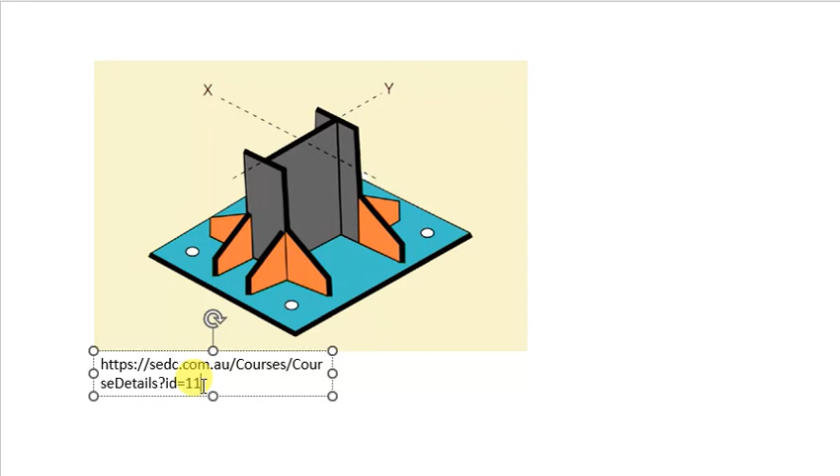I was browsing the internet and got some good pictures which can help illustrate what they really are. I got this picture from this website, you can follow through and read more about it. If you can see, this is a column sitting on a base plate. There are some steel members, steel plates, which are welded onto the column and also the base plate.

So these are exactly what we call stiffeners. If somebody is wondering what they really are and what they really do, I think this is the video for you. That is a stiffener.

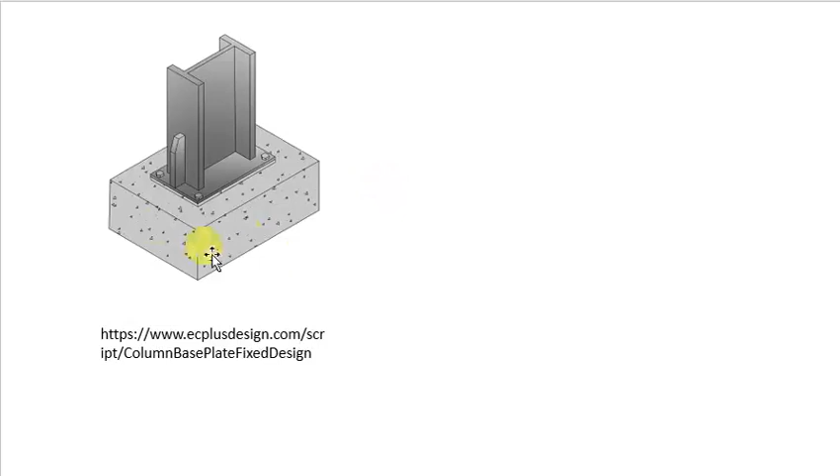I also had another picture here, another stiffener. These are called base plate stiffeners because they stiffen the base plate. We'll come to that in a short while. There's a stiffener here, welded onto the column and also the base plate. There is also another stiffener, welded onto the column. So these are column stiffeners.

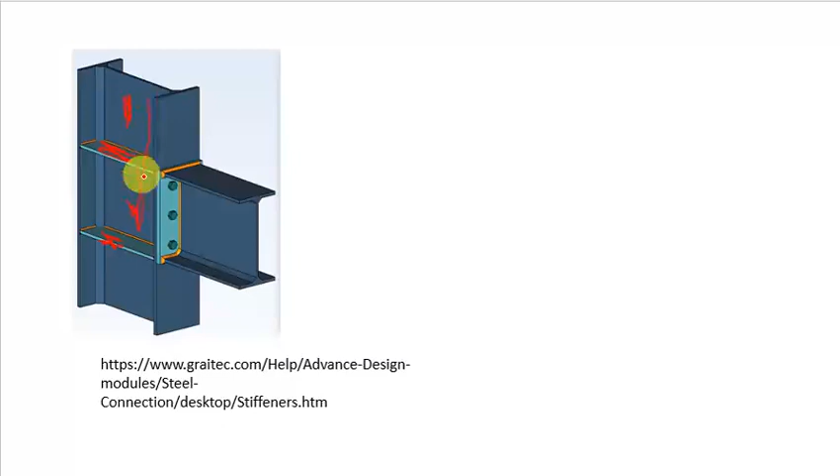This one here is stiffening the web, but why should we add them? We're going to see that in a short while. There is also a stiffener welded onto this column or onto this web. Maybe the final one, we also have stiffeners here, welded onto this web, the web of this girder. Therefore we really need to understand what they are and at what point do we really need them.

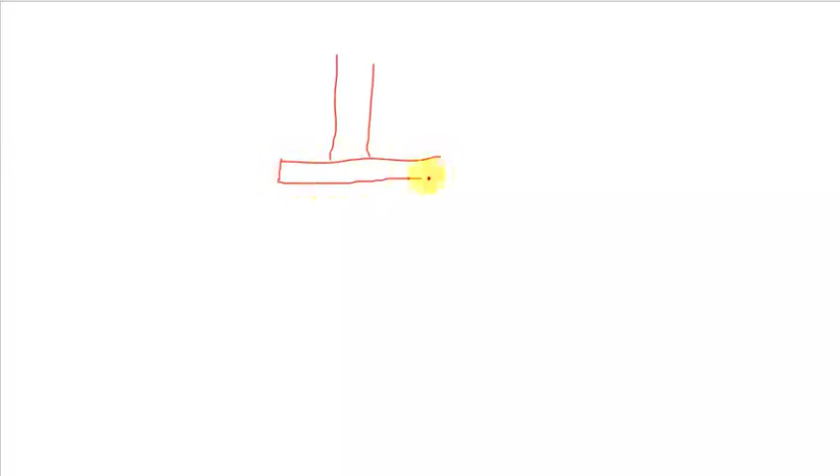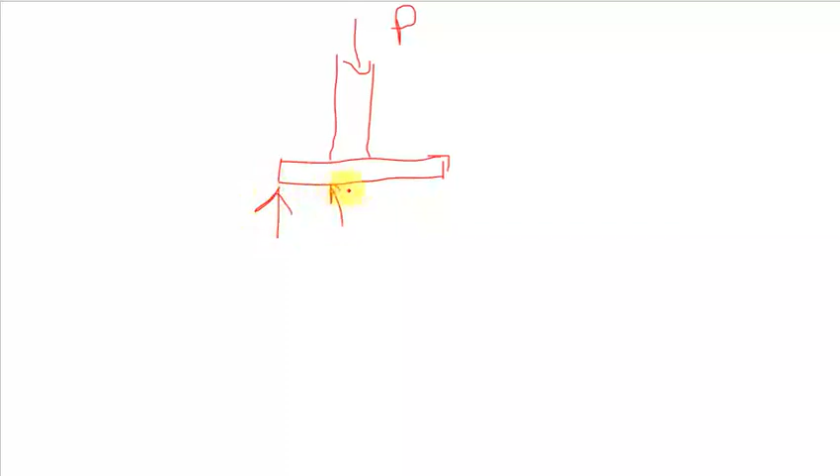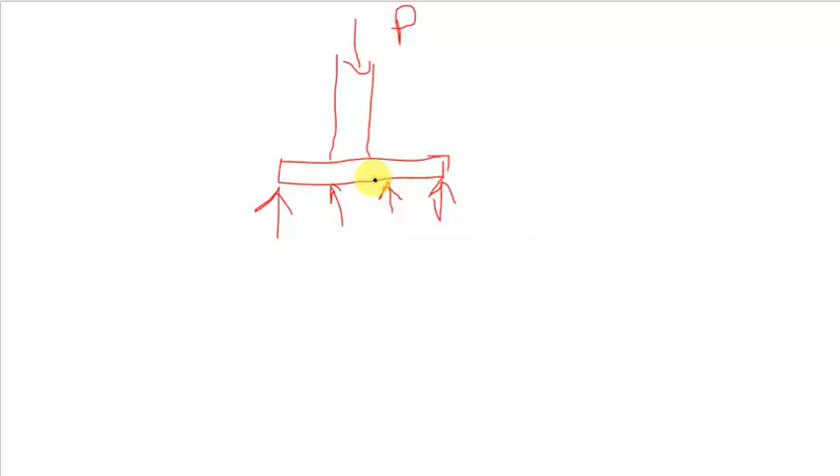If we go back to the first picture, how the base plate works is that when you have a column, I'll do a sketch for that - this is a base plate, and you have a column. Then there is a load coming down this column, say P. What happens is there will be a reaction at the bottom of this base plate, a reaction from the support below, and that reaction will cause bending in this base plate.

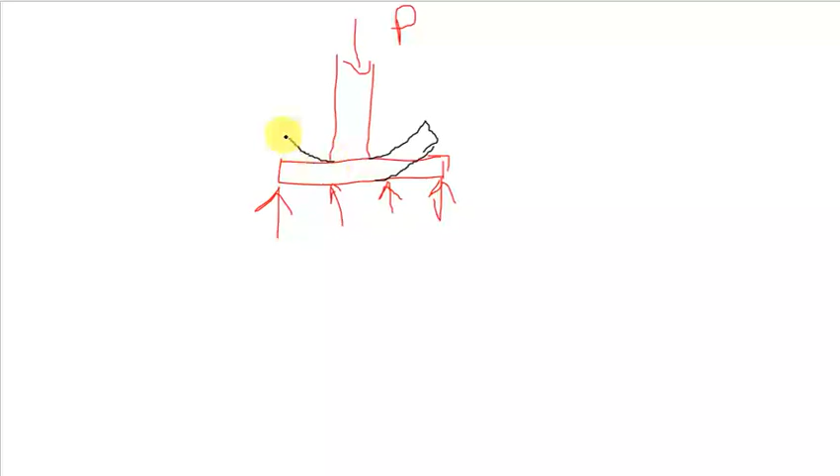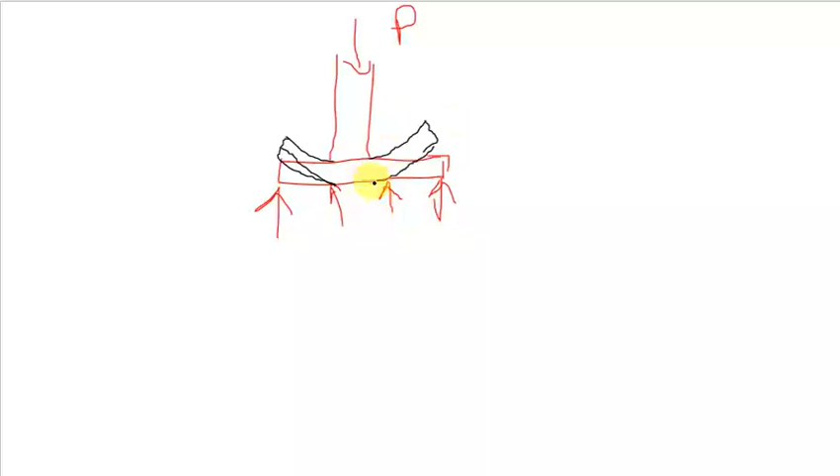So this base plate will bend and become something like this, because of that load coming down, because of that reaction coming from the bottom. So this is what we expect - it will behave like a double cantilever. We have a cantilever on this side, and also a cantilever on this side, with a distributed load at the surface here.

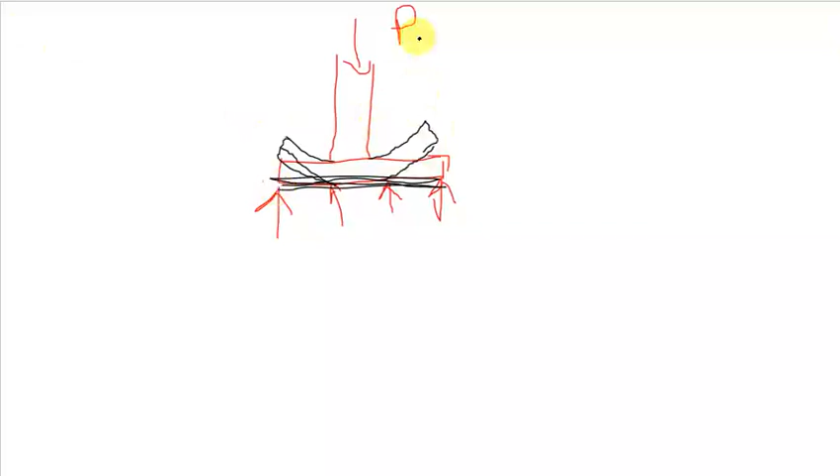So what exactly will happen? If we draw a bending moment diagram for this - this is the column, and this is the base plate - you're going to have something like this. That is the bending moment diagram. Obviously it's going to be parabolic, but for simplicity of design we just do a linear curve. So this is how the bending moment diagram will look like for this one.

That means we have very high bending moments at this point, at the edge of the column here. This is just a cantilever supported by this column, so it bends like this, it also bends like this, so we have very high bending moments.

But if you have to design for this bending moment - let me just delete this, let me erase this - if you need to design for this bending moment here, because this is the maximum bending moment, that means you have to design your base plate to take that bending moment, which is very high. That means you'll require a very thick base plate, which at the end of the day is very expensive.

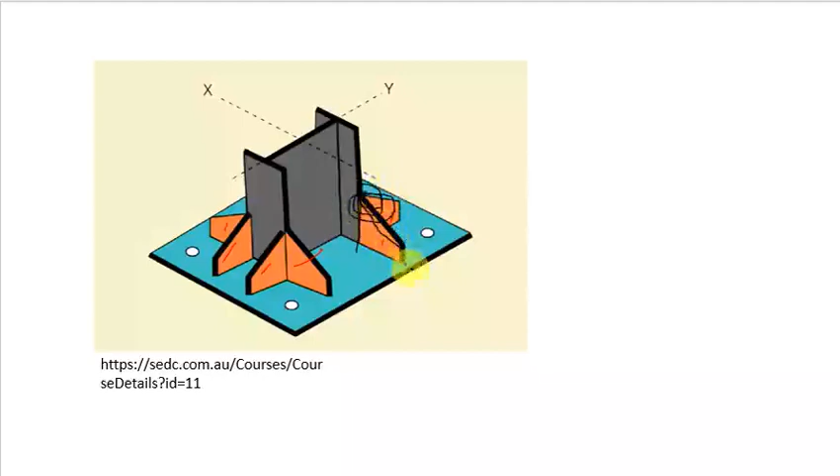That means you don't really need very much area at this point, because there is very little bending moment there. That is exactly why we need stiffeners at the base plate, so that we don't have excessively thick base plates. We can just do a small base plate, but obviously you have to check that through design.

After that we just add stiffeners. So what will happen here, after adding stiffeners, we'll have some kind of supports. We have a support here for this base plate. Look at this base plate here, it is now supported here, and it is also supported here. That means the effective length is now reduced.

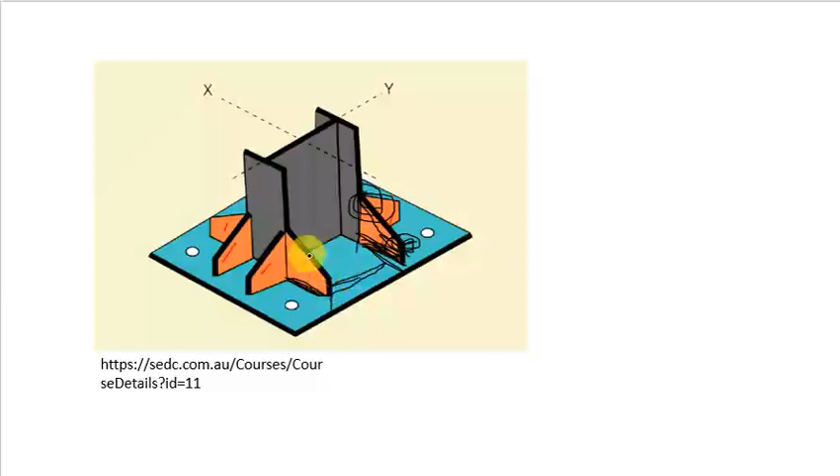Now take for example, you want to draw the bending moment diagram for this one. Compare if you don't have a stiffener and if you have a stiffener. If you have a stiffener, the bending moments will be so small that they can be carried by the plates alone. But if you really do not have the stiffeners, that means you have to design for a very thick base plate.

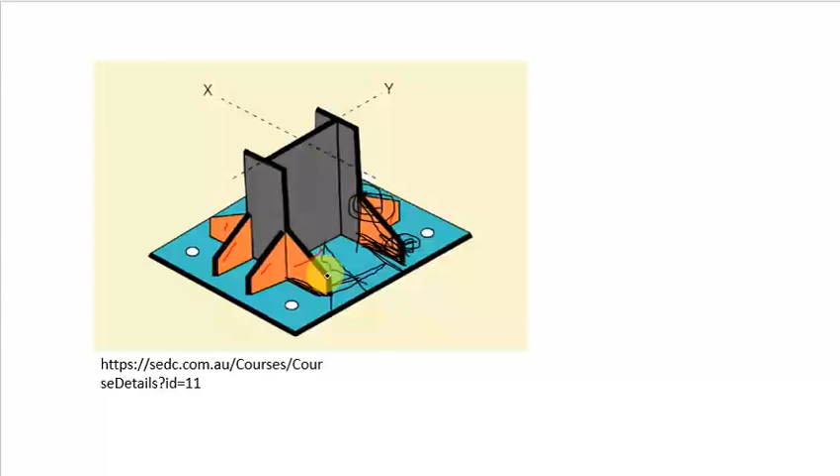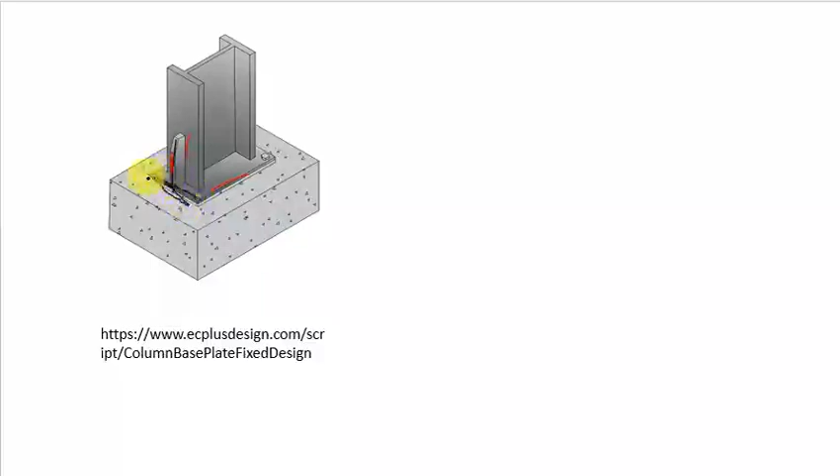The same case applies for this photo here. If you look at this stiffener, it is added to stiffen this base plate, so that it doesn't yield because of the excess bending moments. So that is literally the idea about the base plate stiffeners.

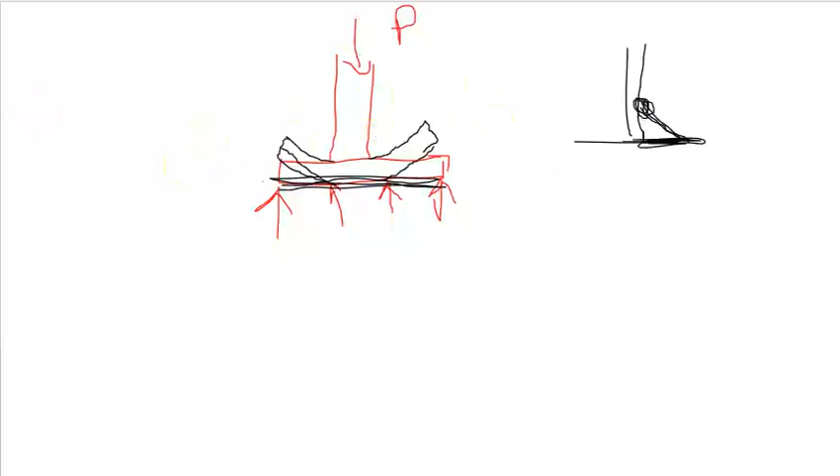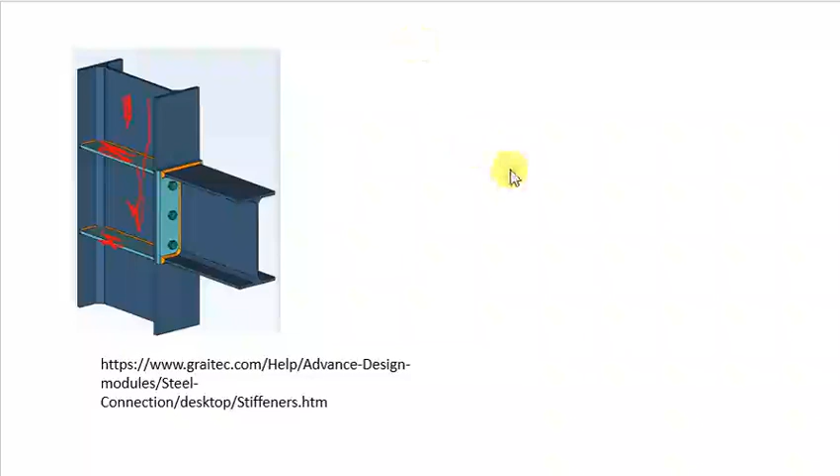So we have the base plate stiffeners, and we also have the web stiffeners. That is a very good explanation for the base plate stiffeners. We can check again the web stiffeners. If you look at this one here, let me just do this. Yeah, so this is a web stiffener.

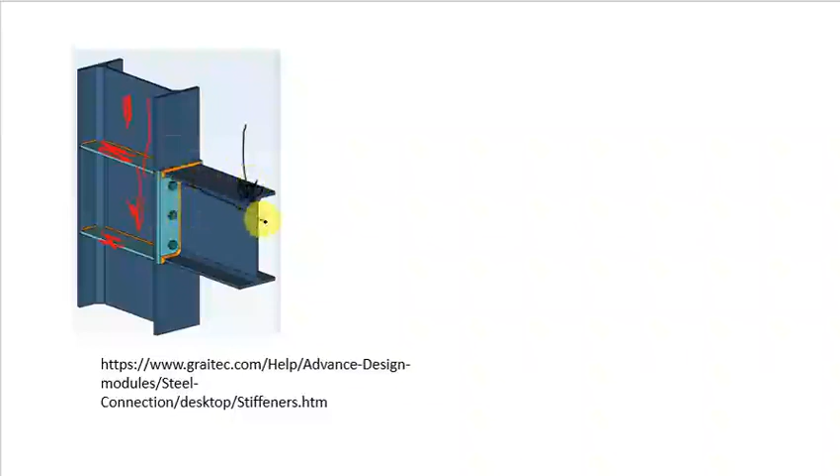And how does it work? If you load this beam here, which is attached to a column, and apply a point load at this point, what will happen to this beam? This flange will be in tension, and this flange here will be in compression. I hope we understand that.

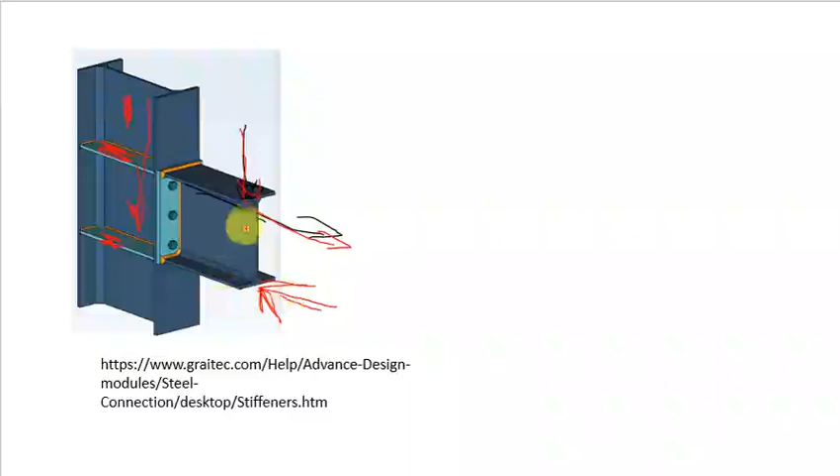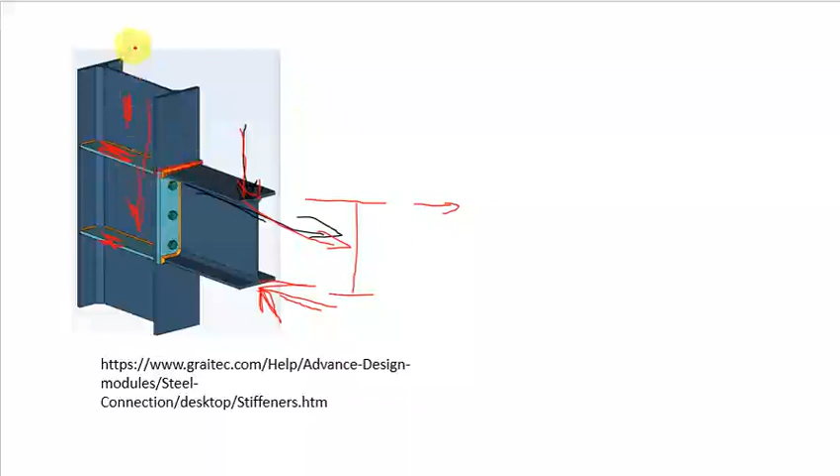If you apply a point load at this point, that will set this member into bending, and if it is bending, then this top flange will be in tension and this bottom flange will be in compression. So what happens is that is the depth of your section, and you have force at this point. Actually, you have a moment, because the distance from the centroid of your member to where the load is applied will give you a moment. That is an external moment, and that external moment will cause the internal moment in this member.

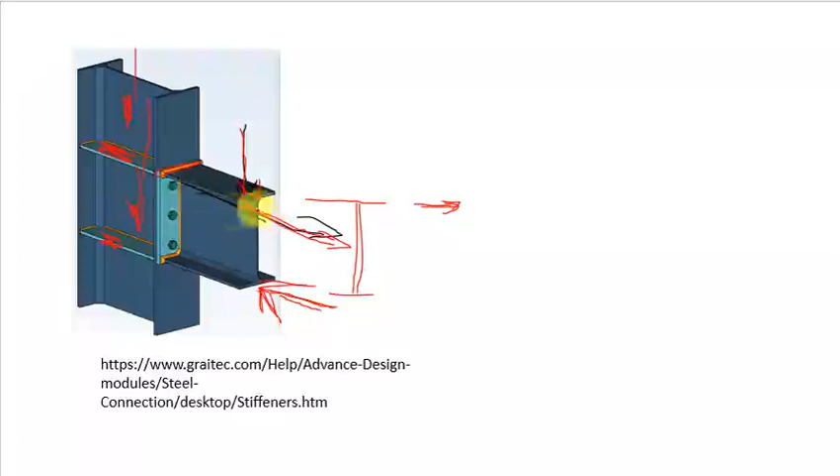So if you take this force, you multiply by the lever arm, which is just the distance between these forces - this is the tensile force, this is the compressive force. If you take this force and multiply by this distance, you will just get the moment, which is force times distance. That means if we have this moment, then we can get both the tensile force and the compressive force, because we know the distance here.

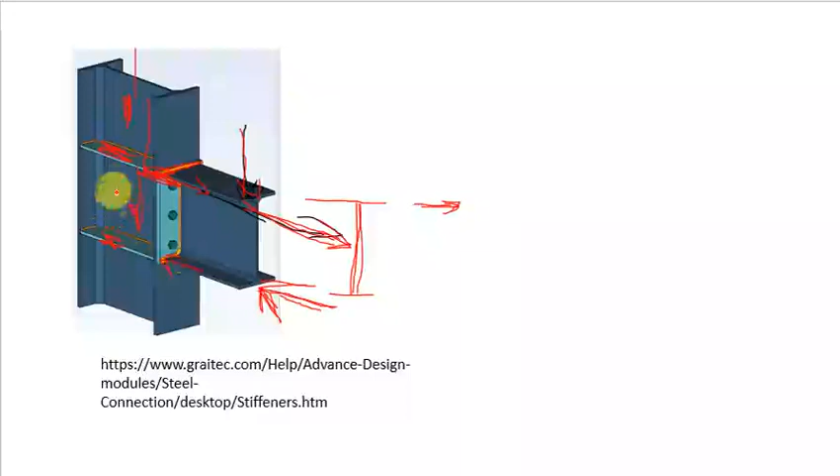So after that, we are now applying in this column a tensile force at this point. Then at this point, we are applying a compressive force. What will that do? That will stress our web here very extremely.

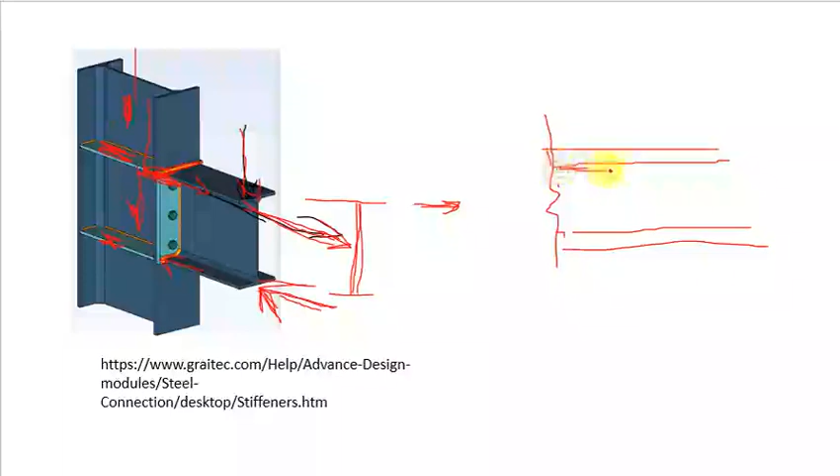If this is a web, let me just draw an elevation of a steel section here - these are webs, these are flanges. I've just drawn it, I can also do a section that will make it look clearer. So we have a section here, this is a steel section. This is just an elevation through it, as we look at it from this side.

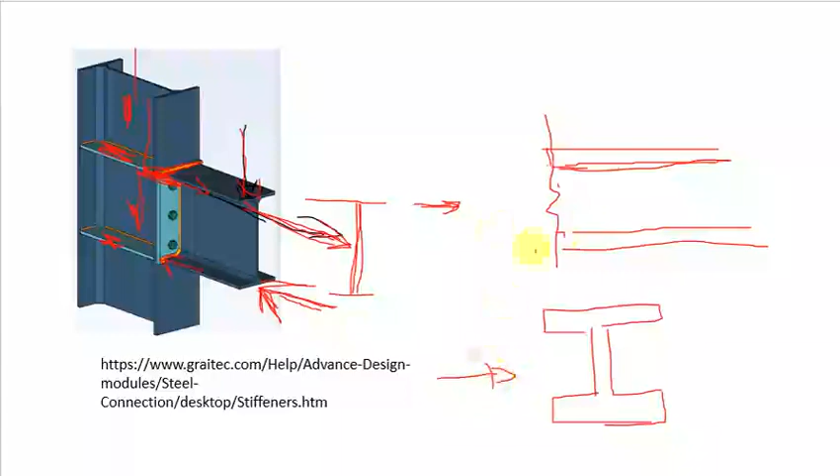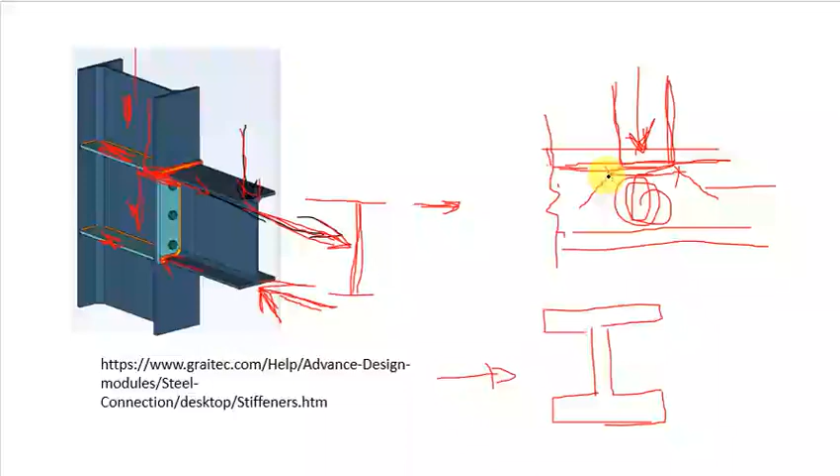And then you apply a point load at this point. If you apply a point load here, the load will just be carried by some part of this web, not the entire web. So if we have maybe a silo, or a secondary beam sitting on this primary beam, then what will happen is that load will be distributed like this. That means at this point in our web, the area which will be carrying that load is just some area specified by the code - you can get that from the code. That means this is the only area which is carrying that point load from the top.

That is the only area which is carrying that point load. And what will happen if that is the only area carrying that point load? This web can buckle, or it can cripple. It can also crush, right? So buckling...

Buckling is where you have this web bend out of plane before yielding. The entire web buckles out before yielding because of this concentrated load here.

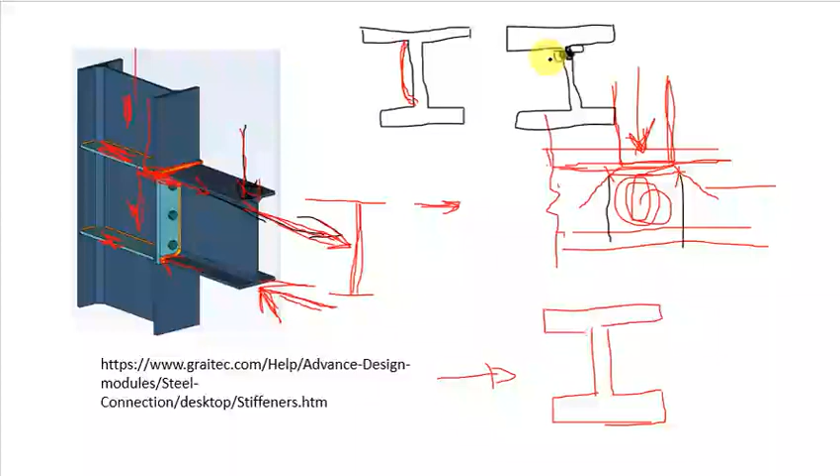And if you speak of this web buckling, or web crushing, or web yielding, it's very simple. You just have a web, a section, but this section will just fail at some point. It will just crush - that means to yield. That means the material of the web has reached the yielding point.

So what you have to do is make sure that you design that web to be able to carry that load. We also have localized failure, where you just have a section of this web buckling - it's called local buckling of the web. So you have to really check your web. If your web is not sufficient, then you have to make sure that you provide stiffeners. So that is where stiffeners come in.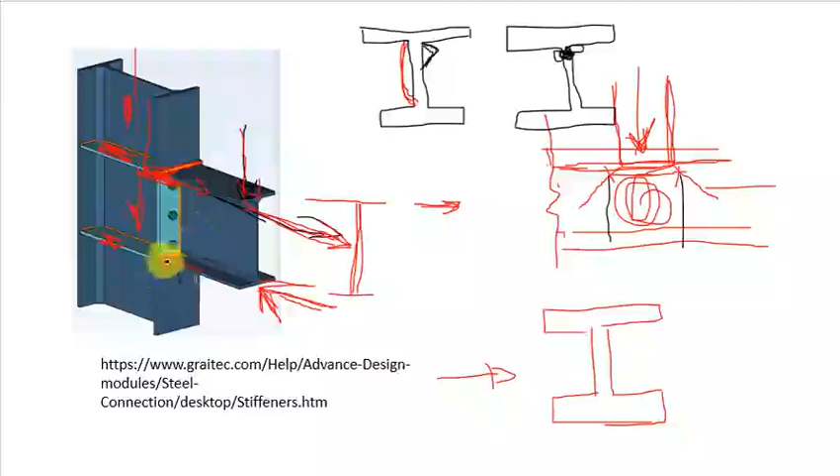The reason I was explaining this is to bring that point right here, that this force will just be carried by some part of this web, and this part of the web can buckle out, it can crush, or it can cripple. So what we need to do is ensure we do the check, and ensure that web can really carry that load. If it can't, then we provide stiffeners.

So these are the stiffeners. Stiffeners are meant to stop this web from buckling. So if you provide a stiffener here, this is a stiffener. I also provide a stiffener here. Then this section of the web will not experience local buckling or the global buckling of the web.

So that is entirely how it works. If you understand that, you'll be good to go. So make sure that if you're designing for this point load, you check for all of them. You first check for the entire buckling of the web, then the local buckling of the web, and obviously check for crushing. And if it is not sufficient, then you provide your stiffeners to take care of that.

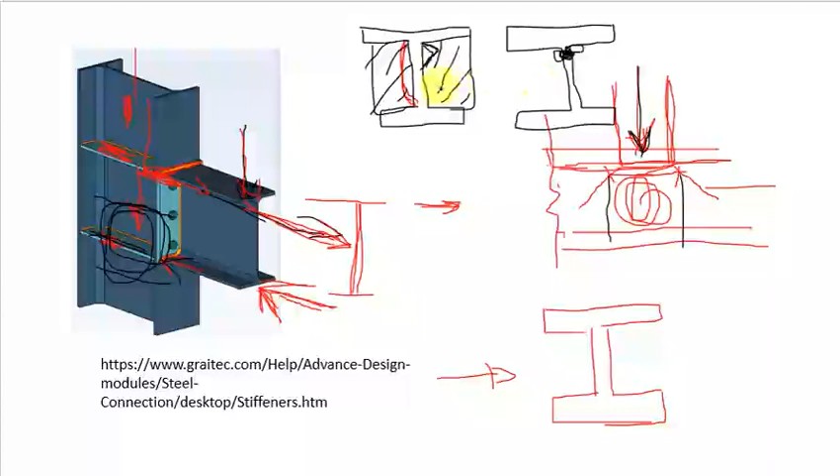I think there is a mistake which people usually do. Let me explain that - a mistake which most designers do. What most of the designers do, which I feel is a mistake, is that if you have a section here, and you apply a point load...

This is the elevation of the section. These are flanges. And you apply a point load. So maybe we have a support here, and you also have a support here.

The mistake you should be really very keen about is, because if you do the shear force diagram here, it's going to look something like this. We have that point up to there, and then this - the shear force diagram.

So you find most of the time designers just take this maximum shear force, and that is what they design for. But that is very unfortunate, because you have to check for this point load here. You have to check for the effect of that point load in that member, and you have to check for it at a distance away from the edges where the point load is being applied.

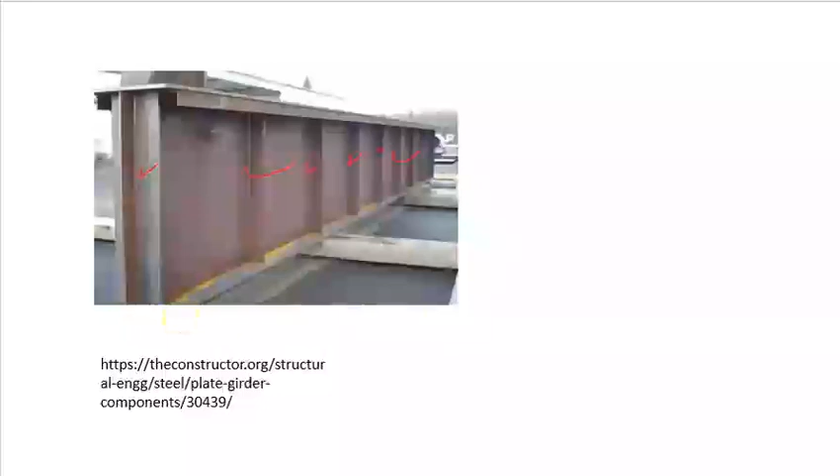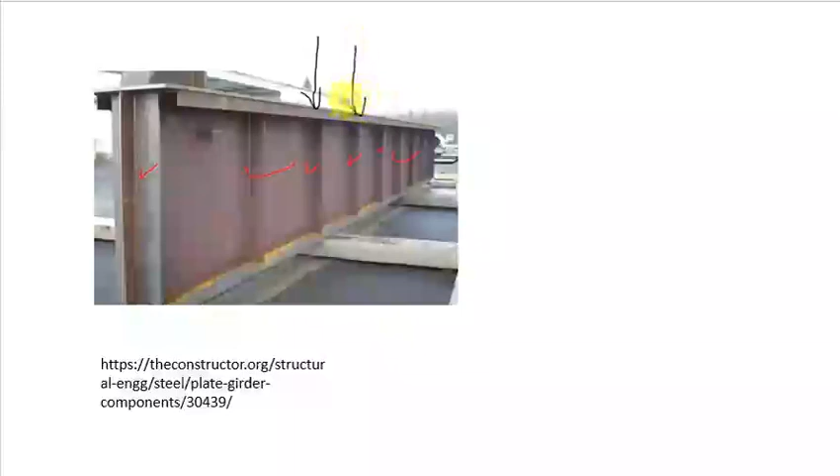Well, that is just the same thing with this one here. If you have point loads now coming down this girder here, and you realize that your web cannot take them, then what you do is just provide your stiffeners to take care of those excessive loads.

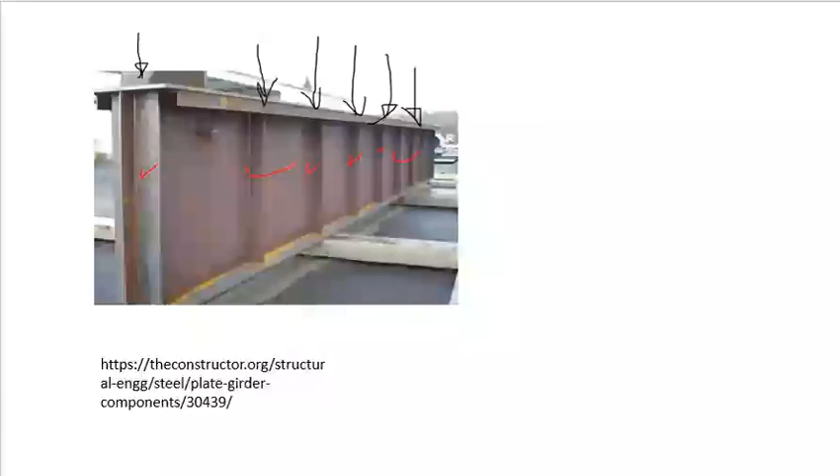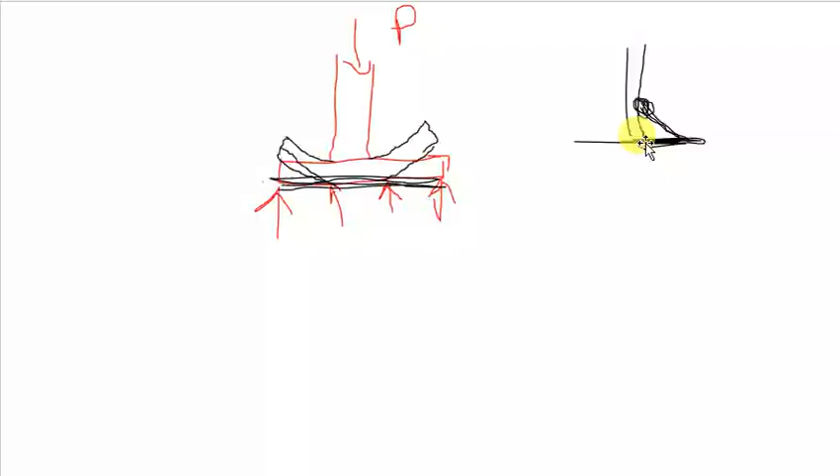So I think a good take home is that - maybe from the very first slide, this is for the base plate - you provide stiffeners to take care of the base plate so that it doesn't get very expensive. And that is what I was trying to illustrate in this slide here, in this page.

The same thing here, and we've seen that for us to provide stiffeners, then you have to check for web buckling, web crippling, and also crushing of the web. If it is not sufficient, then we do provide our stiffeners here.